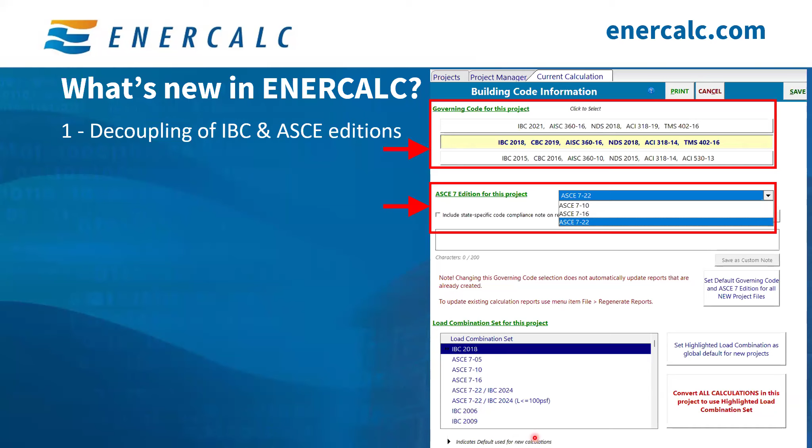Instead, they're just kind of hopping around and grabbing different editions of the code. Now you are able to do that, because beforehand all of this used to be lumped up right here. So the IBC would have an ASCE right here with it. And now you have the ability to pick these two separately. And of course, you can pick different load combinations separately as well. So you can mix and match as you please and as the jurisdiction requires.

The second update is the addition of new ASCE 7-22 modules. So we started with adding new tabs to the calculation menu. And the first tab, as you can see here, is seismic loads. We added two modules, one for seismic base shear design and one for seismic wall anchorage.

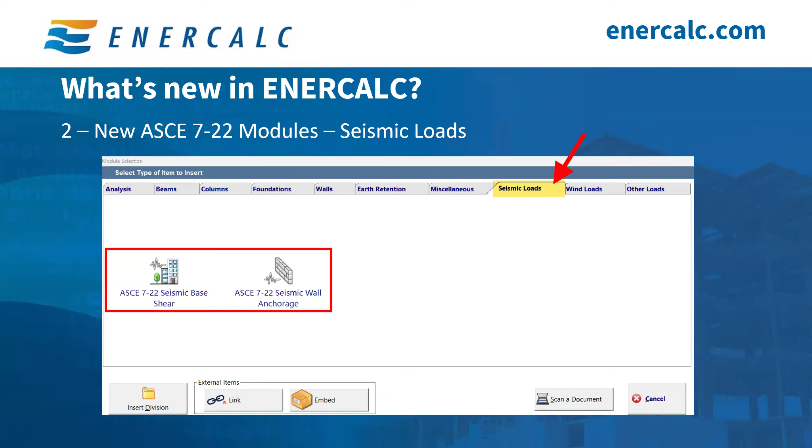Next, we have the wind loads tab. We started already by implementing a calculation for the ASCE 7-22 wind enclosure. And the other wind load calculations, such as the component and cladding or the envelope procedure for wind loads and wind pressures, are actively under development and will be released soon. And when they are released, they will show up right here.

Lastly, we have this new tab, which is named Other Loads. This currently includes a calculation for the ASCE 7-22 live load reduction, but in the future, it will also include other calculations such as snow loads.

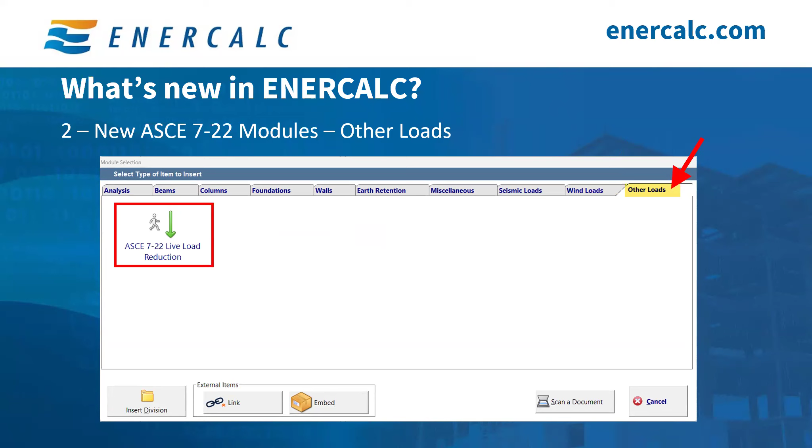One of our most requested features is the ability to automatically link reactions from one calculation to another, and the ability to change something in one member and push one button to have the effects of that change trickle down to all of the supporting members, all of the downstream members. And ENERCALC has done just that with the native load linking feature that was released a few months ago.

So you can see the new tab on the top called Calc Order. This tab organizes all of your calculations based on the load path order. You can see here that we have beam number 1 first, and then after that we have the girder, then transfer girder 1, transfer girder 2.

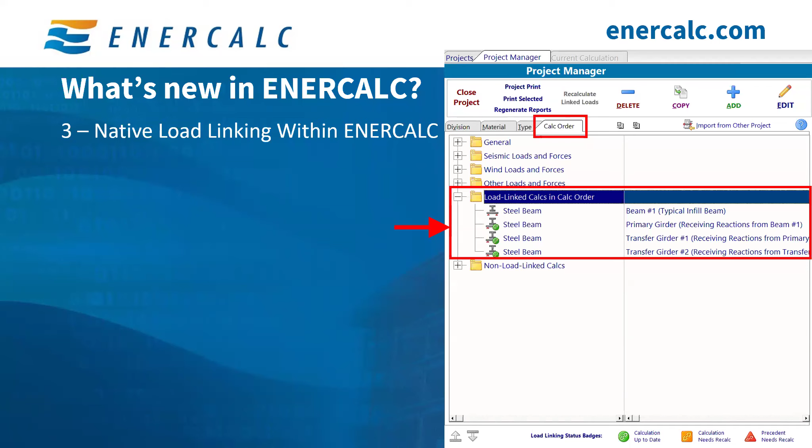You can link multiple calculations from multiple members at the same time, and ENERCALC understands the load path logic and ensures that all the calculations are performed in the load path order based on the reactions or the loads that are being linked. We also added load linking status badges to help you navigate the status of each calculation and understand the warnings a little bit better.

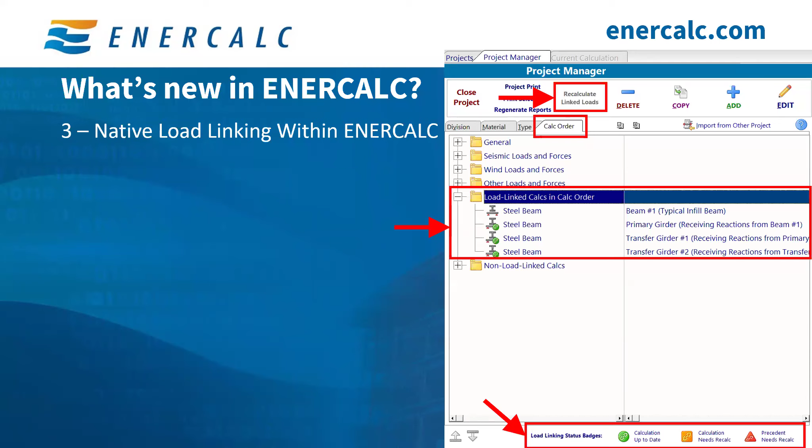The new button at the very top is named Recalculate Linked Loads. This button allows you to bulk recalculate all of your calculations to ensure that the most up-to-date reactions are being used and their effects are trickling down to all of the related downstream members.

We added a new tab inside your calculation called Linked Loads. You can grab reactions from whatever calculations you already have created in that ENERCALC project file. And then as you cycle through, this is the list of the calculations that you already made.

So as you cycle through this list of calculations, this 2D diagram changes to jog your memory a little bit about what this calculation looks like. So you can see the support, you can see the load, you can see a little bit of a 2D diagram or 2D sketch of that calculation.

Below the diagram, you will see the supports. So this is support 1, for example. This is support 2. And you can see the reactions, and you can click on whichever one you would like to grab so you can apply it onto your current beam or your current column or your current calculation.

Next, you determine how you want that particular reaction to be applied to your current member. For example, if you want it to be applied at third points, then you can just choose this. You can, of course, specify a specific location, midspan. You can do a variety of things. Once you're good to go, let's say we want it to be at third points, then you click on this button right here, the Link Load button, and the load will be linked.

And this table right here summarizes all of the reactions that you linked into this current calculation. So if you grabbed reactions from multiple beams, for example, then you will see all of them listed right here.

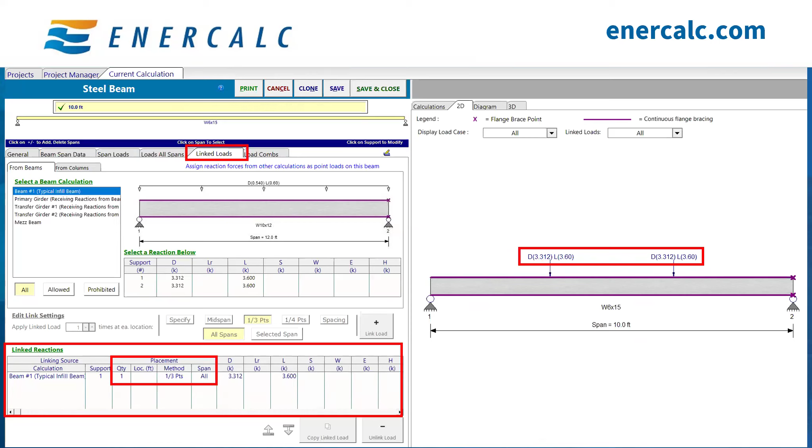As you can see, for example, this shows that the placement is at 1/3 points, and you can, of course, clearly see that already being applied in the 2D sketch at the 1/3 points. So overall, load linking is a powerful and intuitive tool that allows engineers to create a smart and well-connected chain of calculations, while minimizing the risk of transcription errors, as well as increasing workflow efficiencies.

So lastly, on this topic, if you go on ENERCALC's YouTube page and click on playlists, you will find a playlist dedicated to load linking. This one right here is the ENERCALC office hours, which has the recording of the office hours. This right here is the load linking playlist. It's a simple and easy to follow playlist with step-by-step instructions on how to use load linking. It also goes through the various workflows that you can implement, and explains the status badges in great detail to give the user a full, robust understanding of the capabilities of the load linking feature.

The first video is a full overview, and the second video is a short walkthrough of an example on how to use load linking. Videos 3, 4, and 5 are a deep dive into all of the various functionalities. You can simply give this playlist to a new engineer or someone who's never done anything with load linking, and they will be able to fully understand and follow the instructions, and learn more about the best practices of how to use this powerful tool.

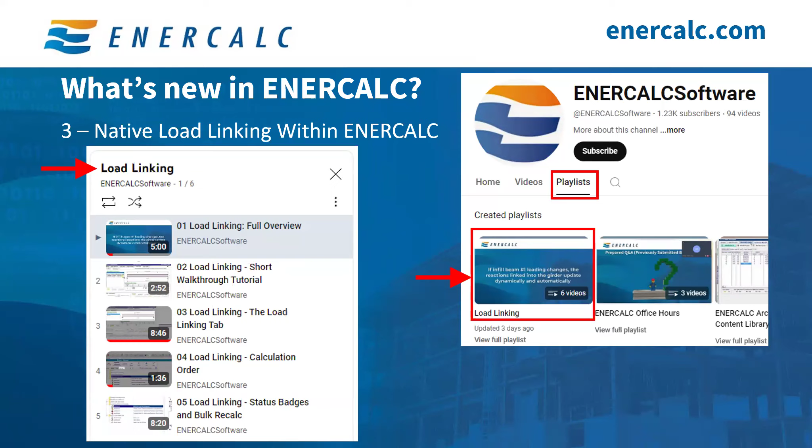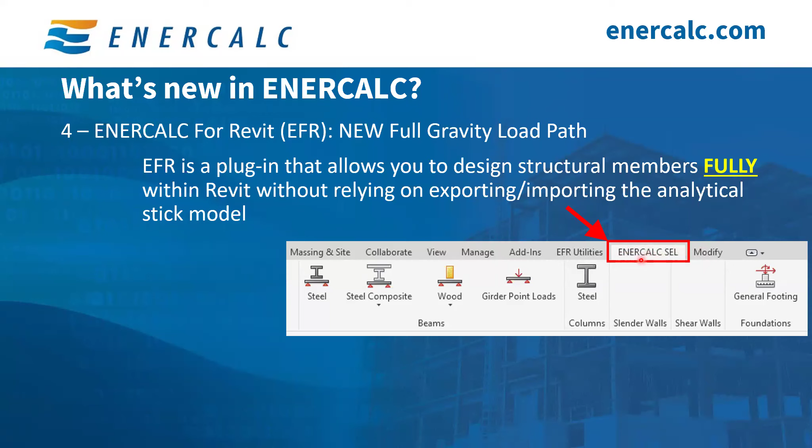Next on what's new in ENERCALC, we have ENERCALC for Revit. We have a new full gravity load path. For those who don't know, ENERCALC for Revit is a plugin that allows you to design structural members completely within Revit without relying on exporting or importing the analytical stick model. This is taken directly from the ribbon bar in Revit, and you have this new plugin that says ENERCALC. Previously, we supported steel beams, steel composite beams, wood beams, and girders. The new addition is steel column design and spread footing design, and this gives you a full gravity load path.

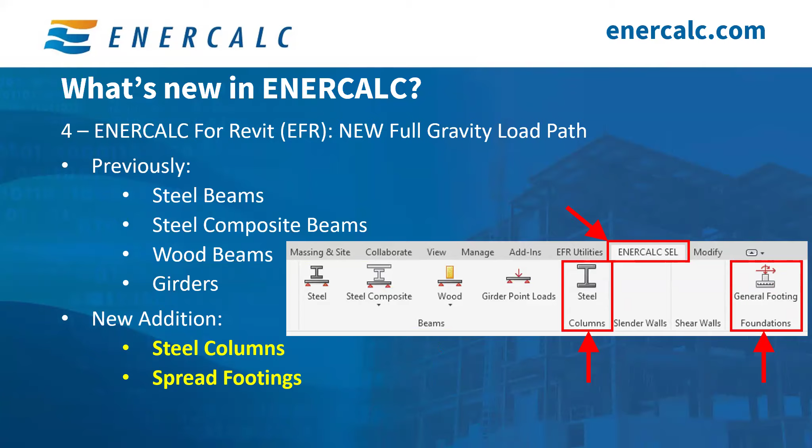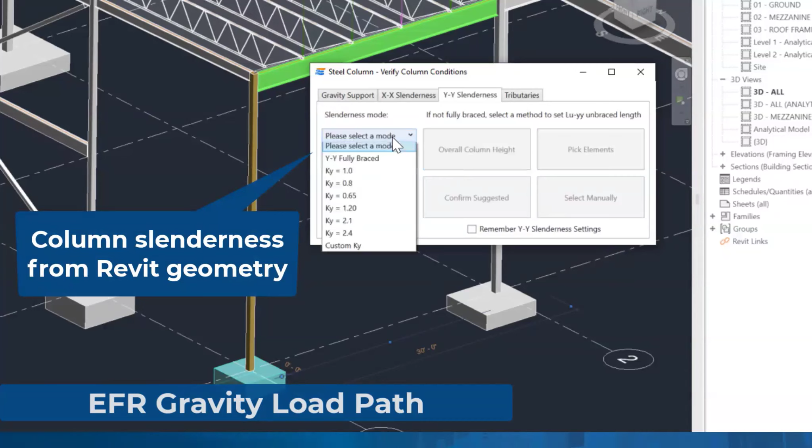To see this in action, this is your Revit model and your new ribbon bar. You click on steel column design and pick the steel column that you want to design. You confirm the gravity support conditions, work with the slenderness in the X and Y directions, and pick your K value. The next step is the tributaries, which automatically detects whatever beams are framing into the column.

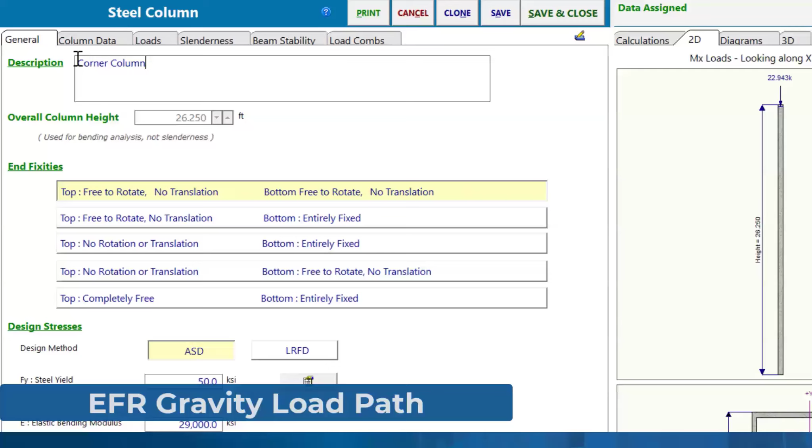Once you click OK, it automatically opens an ENERCALC calculation pre-populated with all of that information, including the column size and the reactions that came from Revit or from the girder or joist framing into it. You can do all kinds of stuff in here, and once you click Save and Close, it brings you back directly to Revit, updates the size, turns it green, and tells you this is good to go.

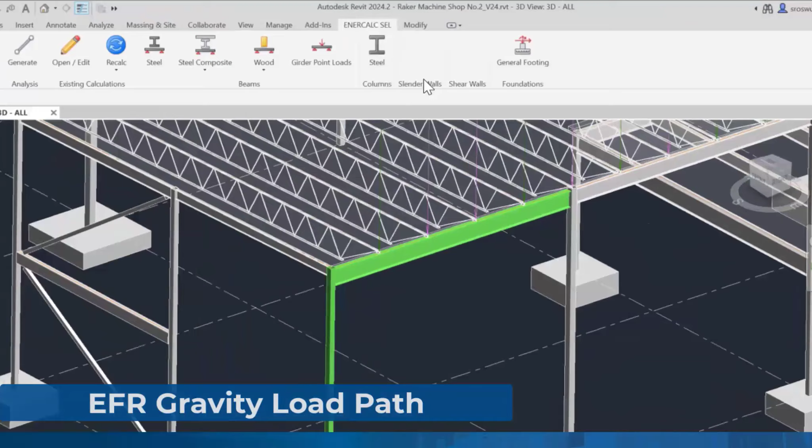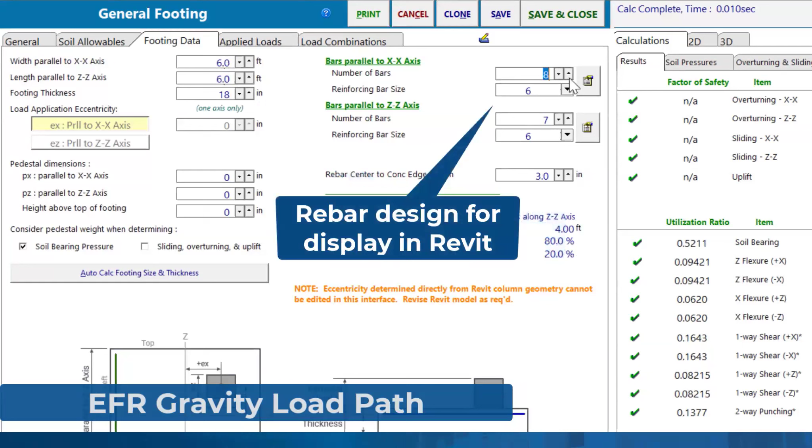You can apply the same point and click logic for the foundation as well. As you design a foundation, you click on it and it opens the ENERCALC calculation for you. It grabs the reaction again, and you can change the size or the reinforcement or make whatever design adjustments you need. Finally you click Save and Close, and it changes the size for you, updates the status of the foundation, and brings in the reinforcement information, which here is 8 number 6 each way, for example.

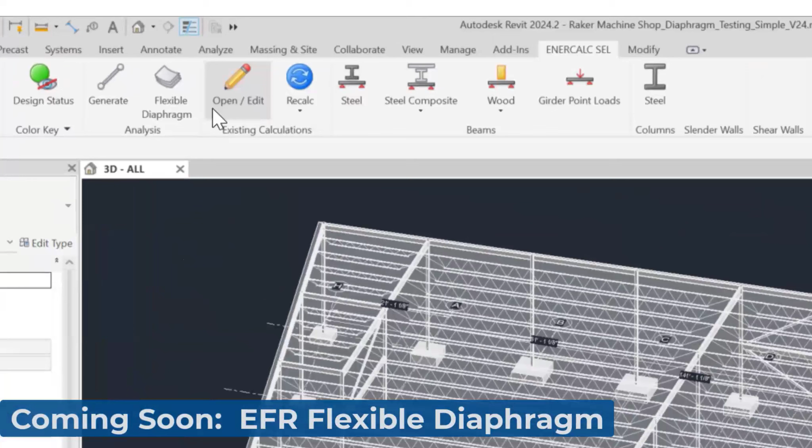Since the topic of today's presentation is wood shear walls, I figured it's a great time to introduce our next ENERCALC for Revit integration, and that is flexible diaphragm analysis within Revit. You never have to manually calculate the loads being applied at your shear walls; this will do the analysis for you. This is still not released yet; it's still under active development. But I wanted to share a little bit about how it works. It's a simple point and click. We have a brand new icon that says flexible diaphragm, with very simple, native controls.

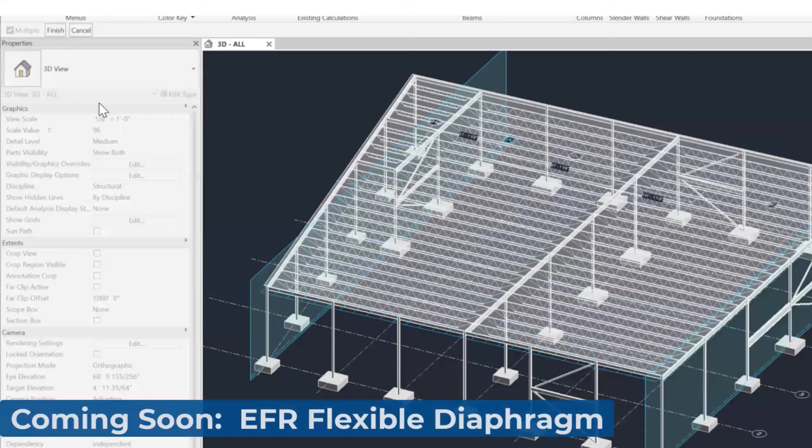It's a point and click, and it provides some interactive analysis. So you can just pick the diaphragm or the floor, and you can pick the loads that you have applied. And then you pick the lines of resistance. So in this case, let's just pick something simple, at every side of the wall or the building, and it takes the load, it runs the numbers for you, and it provides you with the reactions or the line load that's the point load that's going on top of each line of resistance.

The flexible diaphragm tool is very robust because it does, of course, cantilever diaphragm, and it can handle multiple types of loads, and it can do a lot more. This is just a simple example, but it does a lot more analysis than this. But this is the overall idea.

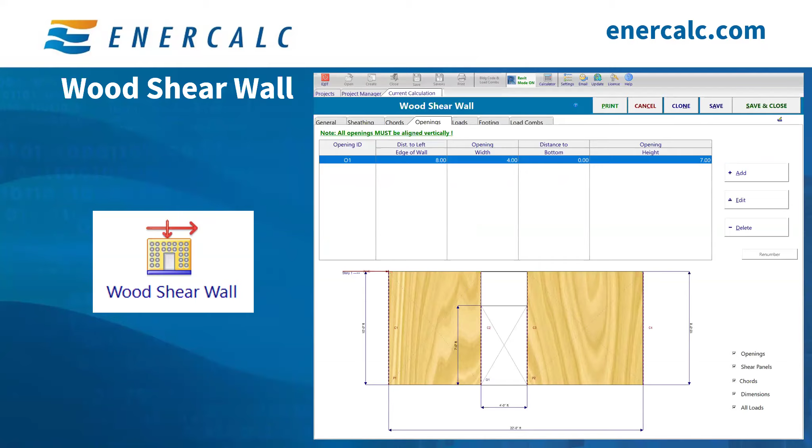Moving on, the focus of our session today is the design of wood shear walls and how you can use ENERCALC to expedite the process and make your life a little bit easier. So to start a calculation, you can follow the same familiar process, which is click on the Add button and then click on Walls, and of course, wood shear walls. And this opens up right here, which is the standard layout that we're all used to.

So on the left-hand side, you can see the line of resistance has two shear walls. So I want to start with this a little bit to identify what we're trying to do. We have a line of resistance that has this shear wall, which is panel 1, and this shear wall, which is panel 2, and they're split here by a door. So we want to design this using ENERCALC. We have to establish the geometry.

The first panel is 8 feet wide, and then the door is 4 feet, and the second panel is 10 feet wide. And then the height is 10 feet, and the height of the door, I know it's not noted here, but the height of the door is 7 feet. So the total width of the wall is 22 feet.

So on the right-hand side, which is this right here, you can see the wood shear wall module, and it's the first tab, which is the general tab. You can give your calculation a name, just like you normally do with all of your calculations. So let's call this shear wall 1, and total wall length. This is the full length of wall, and that is 22 feet. And I'm designing this wall to have stud spacing of 16-inch on center.

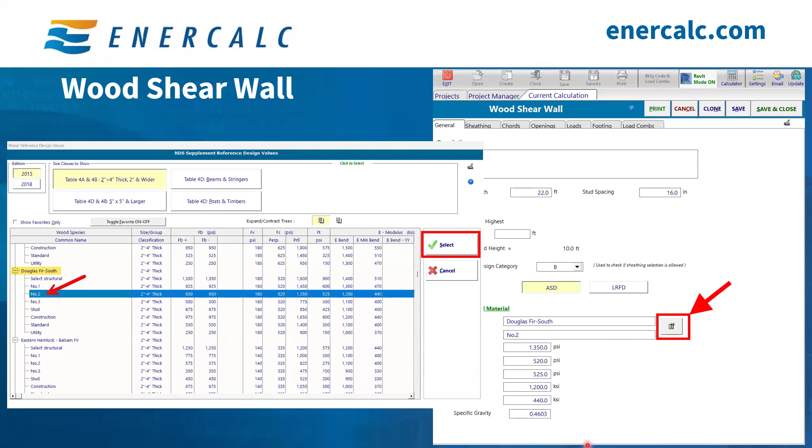And to pick that material, this is the same process that happens for wood beams and wood columns. So if you've used these modules, you should be familiar with it. And it's simply you click on this little button right here. And when you click on it, this window pops up and it has all of the reference design values for the various wood species included in the NDS. So you can pick the material that you want, then you click on select, and all of these values right here will auto populate for you.

So now we move on to the next sheet, and now things kind of start to get a little bit more focused on the module that we're doing rather than being general. So this is the sheathing tab. First, we pick the sheathing and fastening pattern on the main side. We start by picking the correct table. We'll be picking 4.3A because that is the one that we typically use for structural applications, and that is the table for wood-based panels.

4.3B is gypsum sheathing. 4.3C is for gypsum and Portland cement plaster. And of course, 4.3D is for lumber shear walls. You can do all of them, so whatever you have, that shouldn't be a problem. But for the sake of this example, we're sticking to the standard table 4.3A, which is the wood-based panels. So the next item is you select here the main sheathing from the menu.

So you will find a list of all of the sheathing materials as shown in the NDS. And for this example, we'll use the wood structural panel, 5/16 inch with 6D nails. And once you pick the sheathing material, the shear capacities right here are auto-populated based on that selection. For this example, we're using NDS 2015. So you can see the nominal capacities pulled up for wind and seismic. And those are the nominal capacities that we will use for our design for wind. So we're right here. That's the focus of today's work.

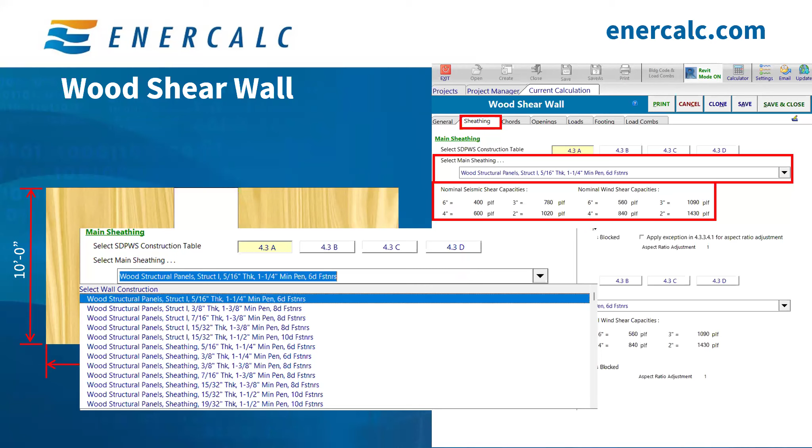So with that being said, we move on to the next part of this tab. We have the option here to select if sheathing is blocked or not blocked. For our example, it will be blocked, and this will matter, of course, in the check for the aspect ratios. If it's blocked, you have a little bit better aspect ratios that you can use with reduction, of course. But for this case, we'll just use blocked sheathing. And this right here, we're not going to use this exception for the aspect ratio adjustment, so we'll keep that unchecked.

If the wall has sheathing on one side only, then you can uncheck this option right here. If you just uncheck it, then that means the sheathing is only on the main side, and you're done. Now, if you do have sheathing on both sides, then you want to enable this option. You will have another option here that says use same as main sheathing. So that means both sides will have the same thing, and these values here will control both sides.

Now, if you want to have something completely different, you can say, okay, on the outside, maybe we'll have the 5/16 wood panels, but on the inside, I want to take some capacity from the chipboard or something. So you can get two different materials for the sheathing. Again, for our example, we'll just use sheathing only on the main side. But I just wanted you to know that you have some flexibility to use different materials and do exactly whatever you would need to do. That's why I unchecked this, and that's why all of this at the bottom here disappeared.

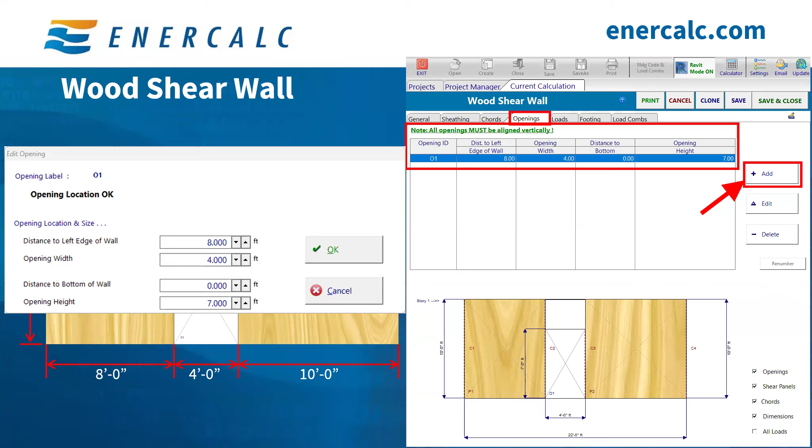Now, I want to emphasize this now that we're talking about openings. The NDS defines three types of shear walls, and this is section 4.3.5. The first type is the individual full-height shear wall. That is the standard shear wall that we all know, just a solid shear wall, and that is governed by this section right here, 4.3.5.1.

And then if the shear wall has openings, that will split into two different types. Type number one is called the force transfer shear wall, and that's the one that is designed to transfer forces around the opening, and you have to do additional detailing to transfer the additional shear around the openings. And that is governed by this section right here, 4.3.5.2.

This is something that ENERCALC currently does not do. The other type of shear walls that have openings in them is a midway method between an individual full height and the full-on force transfer shear wall. It's called perforated shear walls, and this one right here is governed by 4.3.5.3.

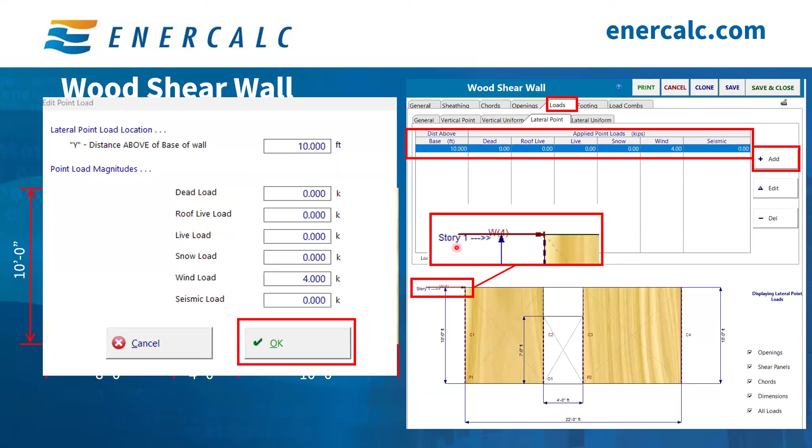You click OK, and that load will be applied, and you can see it graphically shown right here. The next tab is the footing tab, and this one is just a convenience thing. It is pretty convenient to include some of that footing information within the shear wall module, so you can do a quick check of the footing as well, instead of having to take the reactions and try to design the footing by yourself.

So in this tab, you can enter the various info that is needed for footing checks, such as footing geometry, bearing pressure, Fy, f'c, and all that stuff. And of course, how much the footing is projecting outside of the boundaries of the shear wall. So if the footing is extending all the way here, maybe 1 or 2 feet, then you enter that, projection to the left and projection to the right and all of that.

So the last tab in our calculation journey today is the load combinations tab. We have the combinations already populated and ready to be used under the ASD load combination tab right here. But you can also turn them all on or off as you need. You can delete, modify, add more combinations. You can do anything you want. You can maybe disallow some of them from running temporarily. So you have a lot of control over the combinations that you want to run.

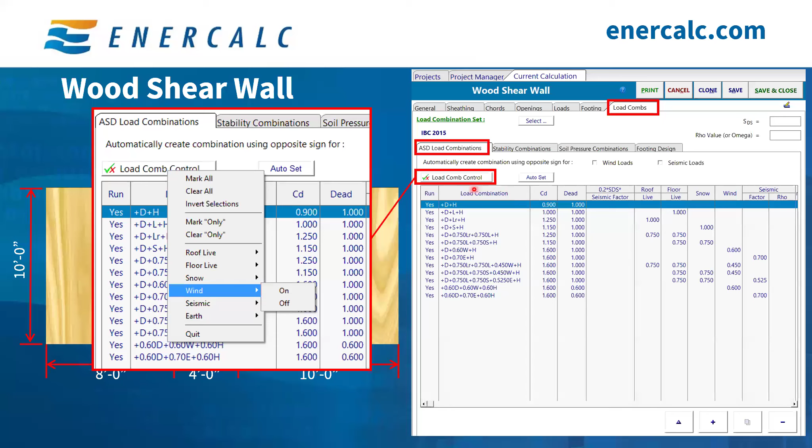And if you click on this little tab right here that says load combination controls, you will find other filters that you can use quickly. So for example, you can turn off any combination that has anything to do with wind load. You can just click on this, wind, and say on or off. If you say off, it'll turn off whatever combination has wind in it. And this is not unique to the shear wall module, but this is for all calculation modules that we have that have load combinations.

There is also a separate load combination set that is being used for footing design. This is due to reinforced concrete, of course, only supporting LRFD design. So footing design, you can see here, has its own set of combinations, which are the LRFD combinations, as you can see here, 1.2 and 1.4 dead and all that.

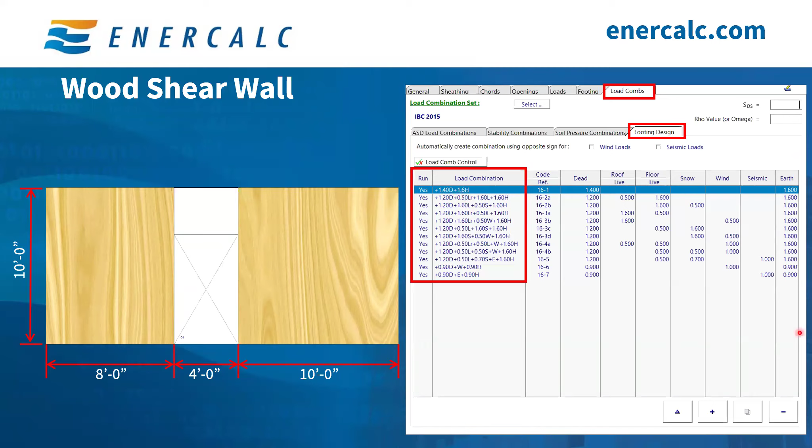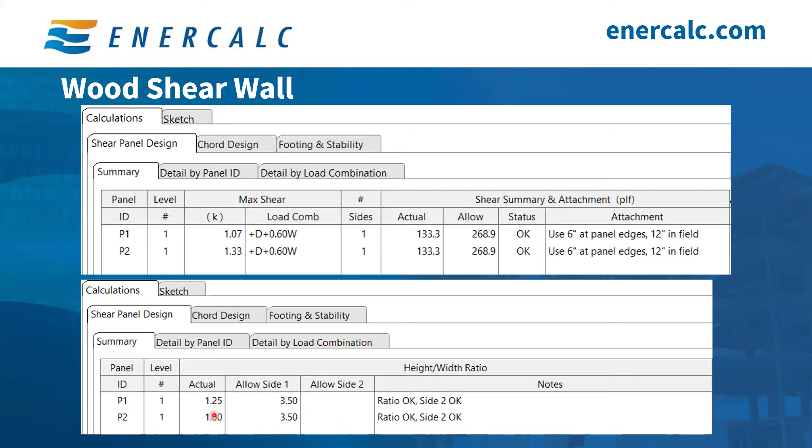You're familiar with ENERCALC, so some of these results you have to scroll horizontally to see. And that's exactly what I did. I scrolled horizontally and took a screenshot. As you scroll horizontally, you'll see more results, such as the aspect ratio of each panel, making sure that it meets code and does not exceed the maximum allowed aspect ratio as noted in the NDS for a blocked shear wall. So you can see right here, ratio is okay, and that's the allowable for each panel per side, and that's the actual aspect ratio if you ever need to check that or need it for something else.

So I want to note something about the allowable shear capacity that ENERCALC just calculated. The safety factor, the omega factor for ASD design, is 2, and this is based on NDS 2015. So this means that the capacity of the sheathing should be 560 divided by 2, which gives us 280. However, ENERCALC here shows the capacity to be 268.9, which is of course less than 280. And this is because we selected the wood material for the framing to be Douglas fir South.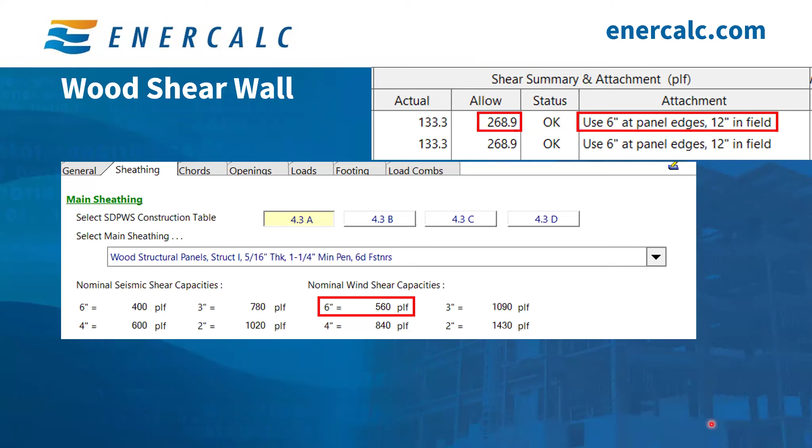And when using this material, the capacity of sheathing must be reduced based on the specific gravity of the framing members. So footnote number 3 in table 4.3a, where we have the sheathing information, says that for wood species other than Douglas fir larch and southern pine, the nominal shear value must be reduced by the factor below, which is 1 minus (0.5 minus G). And G is the specific gravity of the framing material.

I grabbed this snippet from the general tab from ENERCALC. So Douglas fir South has a 0.4603 specific gravity. So if you plug that in, you get 0.9603. So if you take 0.9603 and multiply it by the 280, which is 560 over 2, you'll get the 268.9, and that's why the capacity is reduced in this example.

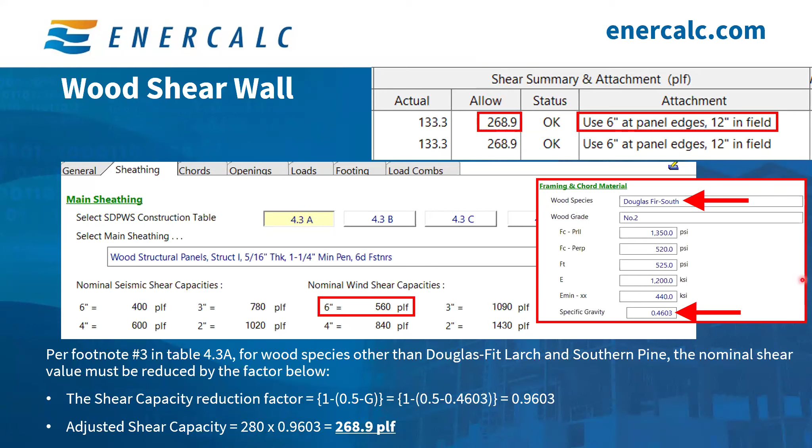Moving on, let's check the chord forces. C1 and C2 are the chords for the first panel. You can see that C1 is in tension and the load that is applied to it is 1.33 kips. The design is governed by the tension, and the stress ratio is reported right here as 0.192. Also, you can see that the hold down uplift force is 1.05.

The reason that the uplift force for the hold down is not the same as the tension on the chord is because of the weight of the panel. As you work your way to the bottom of the shear wall, the weight of the panel accumulates and you actually reduce your uplift by the tributary weight of the panel. Now, if you chose the weight of the panel to not be considered at all, then the hold down uplift will be reported exactly as the actual uplift for the chord member.

So this is just if you want to be conservative or however you want to deal with this. You have the ability to squeeze every little capacity you have, or you can just design your hold down directly for 1.33. The option is yours. And yeah, that's the same thing. So that's for the 1.05.

And then the other part that we have to cover here is the C2, which is the max compression force in the chord. It is the force from the shear wall couple, the tension compression, but also now the weight of the panel is additive to the compression. It helps you when it comes to uplift, but for compression, it actually adds to you, and that's why the compression is reported as 1.43.

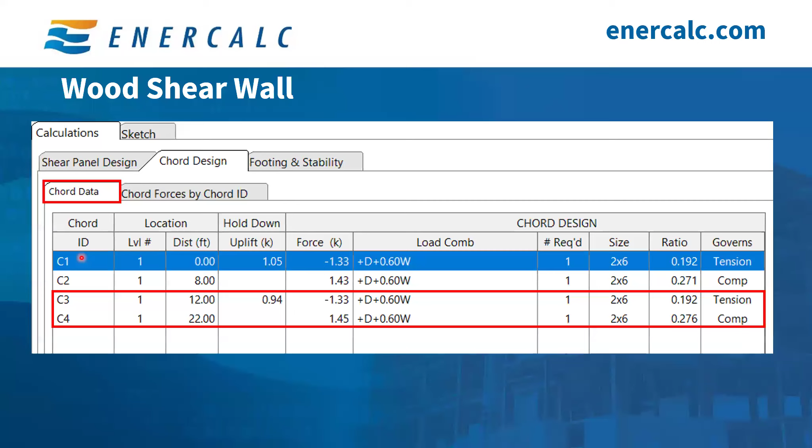Now, this additional weight helps resist uplift, so it helps you here, but it adds to your compression. So that's exactly the same logic. That's why we have a little bit more load on the compression and a little bit less load for the hold down uplift sizing.

Lastly, let's quickly check the footing and stability tab. You'll find a lot of analysis information that would be helpful to help you assess the footing. Quickly to go through this, since foundations is not the main topic today, but at least when you click on the footing stability, you can see right here, for example, overturning ratio. You can see here soil pressure on the left side and on the right side.

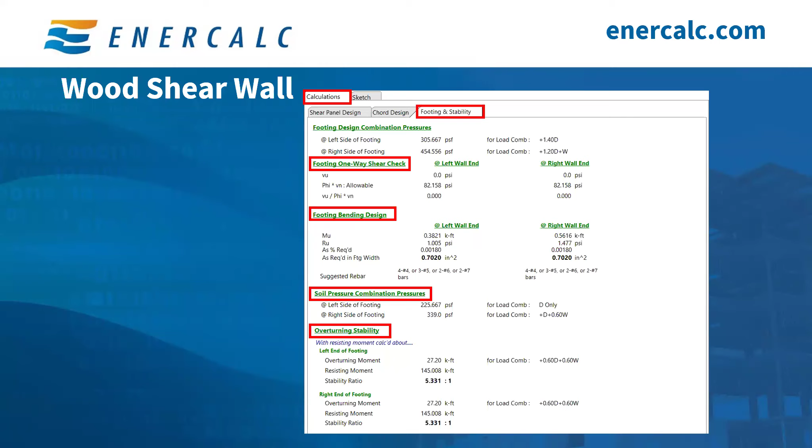So those are analysis numbers, especially this one right here. This is an analysis number, so you need to make sure to compare that to your allowable bearing capacity of the soil. ENERCALC doesn't automatically check that for you. It just reports that number, and you need to make sure that you evaluate it. The stability ratio, it already does that for you, so you're good here, and then it gives you a little bit more information about applied moment and shear and all of that to help you go through the process and at least preliminarily evaluate the foundation that you have chosen.

So in summary, ENERCALC can design a wood shear wall that is subject to axial loads, of course, as well as the standard lateral in-plane loads. ENERCALC can design one-sided or two-sided shear walls, as well as the chord members for tension and compression, and gives you some pretty good control over how much you want to use of the dead load, and the ability to check some quick analysis for footing design, as well as overall footing stability within the shear wall module without having to go outside.

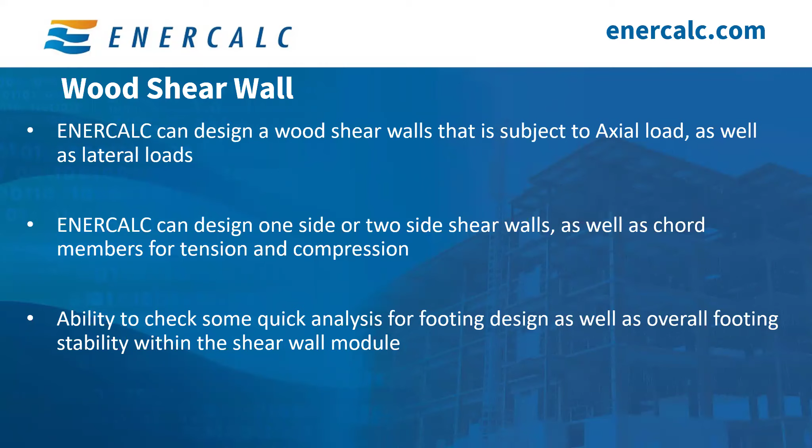So we had a question early on in the session. Are there any plans to add a feature to tie point loads together in the beam design modules? They're basically asking about moving loads. So the short answer to that question is no. ENERCALC itself doesn't have the capability to tackle moving loads right now, and I don't think we have any active development going on that right now.

But you do have some capability in ENERCALC 3D to tackle moving loads. So I'm going to drop a link in the chat to our help docs regarding moving loads with ENERCALC 3D, which you guys can reference to dive deeper on that.

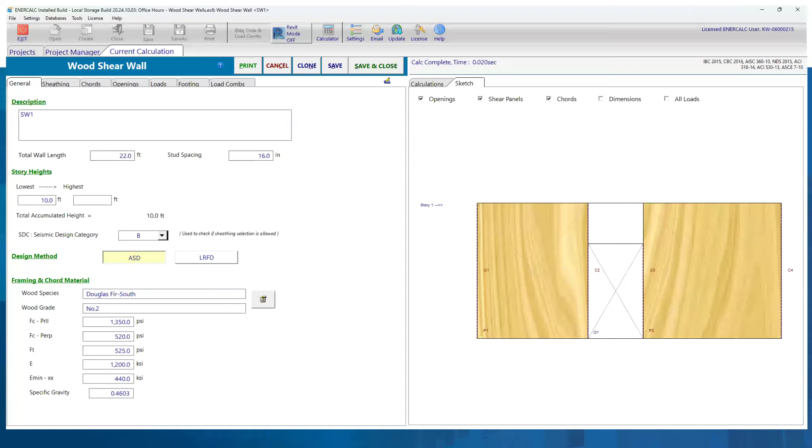All right. Question from Jose. Talking about load linking, Mac, can you also link shear wall overturning reactions from a beam? So do you want to talk a little bit about the roadmap and survey for load linking? Yes. So let me show you guys here. The way that we have this right now, load linking is only implemented in steel beams, so from one steel beam to another right now. But we want to implement it across all of our modules. The thing is that the order of development is tricky because we want to hear from our users which one is more important, so this way it gets developed first.

So with that being said, you can see right here, if you open ENERCALC and you open a steel beam calculation and you click on linked loads, can you see my screen, right? Yeah. Okay, and you click on from columns, you see right here that says load linking survey. If you click on that, that will take you to the survey that we have. So this way you can tell us where you want the reaction to go, from maybe a steel beam to a steel column, or from a masonry beam to a steel beam or something.

So you'd have to tell us, and however many times we get told one specific module, that will get developed first. But the plan is to develop for all of them, it's just the order of development. Right now, we're working on the development of linking wood beams. So that would be wood beam to wood beam, and wood beam to steel beam to wood beam, because the integration is going to be happening in all directions. So right now, it doesn't do that for shear walls. But if you take the survey, and you can take the survey as many times as you want, that will put you up in the leaderboard and allow us to develop it faster than other modules that are not being requested as much.

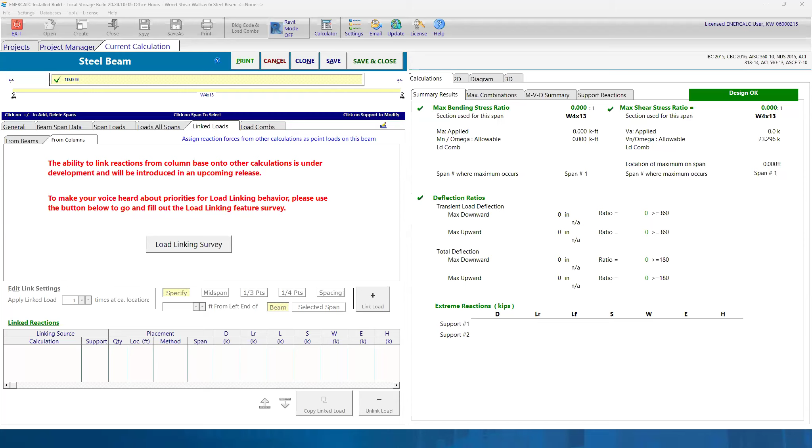We don't have an explicit timeline that we're publicizing for that kind of capability, but it's very much on our radar, and it's an issue that we want to see addressed for our customers. And if that's a big issue for you, if you haven't already, we definitely encourage you to reach out to the support team, support@enercalc.com, and let the support team know that that's a feature you're interested in, because that's what allows us to set those development priorities.

Let's see, another question. Is there any plan to have a module that will take the whole building and design shear walls, hold downs, etc., just like Woodworks software? So this is an interesting question, because ENERCALC has always had a focus primarily on being discrete component design. And that's why what Mac is showing you guys today is discrete design of shear wall components within a system. You would have your lateral system analyzed separately by hand.

So in general, we're not moving ENERCALC itself, especially the desktop structural engineering library, towards holistic system design. But with the stuff that Mac was showing you guys regarding ENERCALC for Revit, we are moving towards other more general capabilities where you have broad scope system analysis, you can distribute forces, and that will dovetail into Revit-based integration

of lateral system design. For example, wood shear wall integration, where you can take a shear wall stack geometry from your Revit model, distribute forces to it using the flexible diaphragm tool, and so on. So not explicitly as such in ENERCALC itself, but we definitely are moving in a direction where you will have those kinds of capabilities.

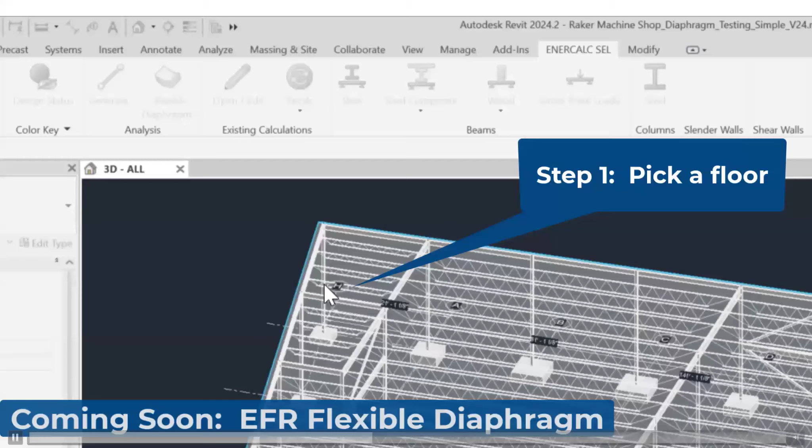Mac, this question will make you chuckle because we were just discussing this. The appearance of the shear wall on my screen is two segments shaded in gray with dashed diagonals, no wood grain displayed. Why is that? So we were discussing this issue with the engineering team, and so far the only way that the engineering team has been able to replicate that issue is if there's a specific JPEG file missing from your program files that is responsible for displaying that wood grain.

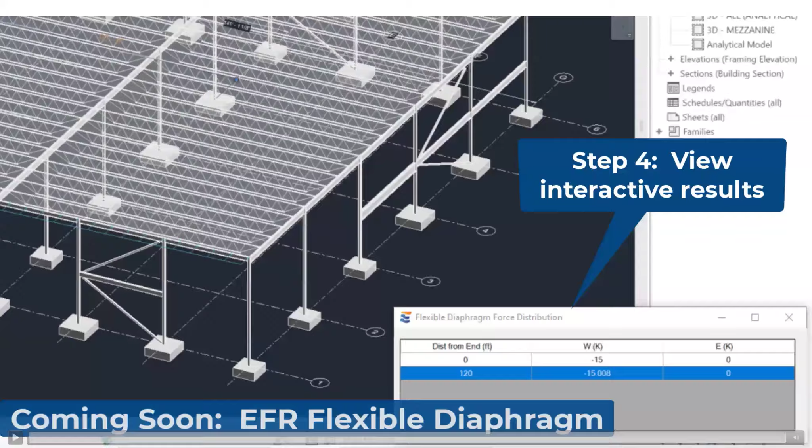If that's the case, you should be able to just go to our website and get the latest public release installer. And when you run that installer, all the files will be there, and that wood grain should appear properly. If that doesn't solve your problem, definitely reach out to the support team so that they can dive deeper and help diagnose that.

Yeah, so we already addressed questions about force transfer around openings. If you're designing a segmental wall, if you deselect the box to apply the full vertical and wall weight to the shear panel, will the dead load be distributed to 4 chords? So basically, is the dead load distributing to all chords of the wall? Mac, you can go ahead and tackle that one.

You are a little more up on that particular issue. I'm trying to see the question. I'm trying to read it. Select the box to apply the full vertical load and wall weight to a shear panel. Yeah. Is this the one? Trying to see which. Is this the option they're talking about?

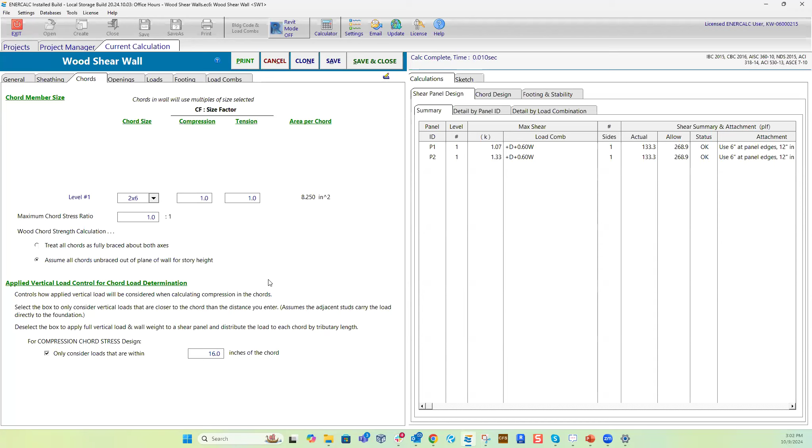Because if this is the option right now, if you deselect it, what it does, it takes the full weight of the panel. So if the panel is 20 feet by 10 feet by 10 PSF, it will take the full weight of that panel and divide it by two and dump the whole weight into the chord. It's almost like saying that, if this is my panel right here, these studs in the middle, any of the weight of the panel is being dumped only at the chord. It's almost like the whole thing is spanning.

So that will add a lot of compression to the compression post, but definitely it will help almost too much with the uplift. So I would be careful on how to use that. But yes, that's exactly what it does. If you deselect this option... the way I do it, I select this option and say only take 16 inches worth of trib and use that to add to compression or to help you with uplift, but only using 16 inches of trib that you're comfortable with.

I hope that answers the question. And each panel is being handled separately. So the weight of this panel over these two chords and the weight of the other panel over these two chords.

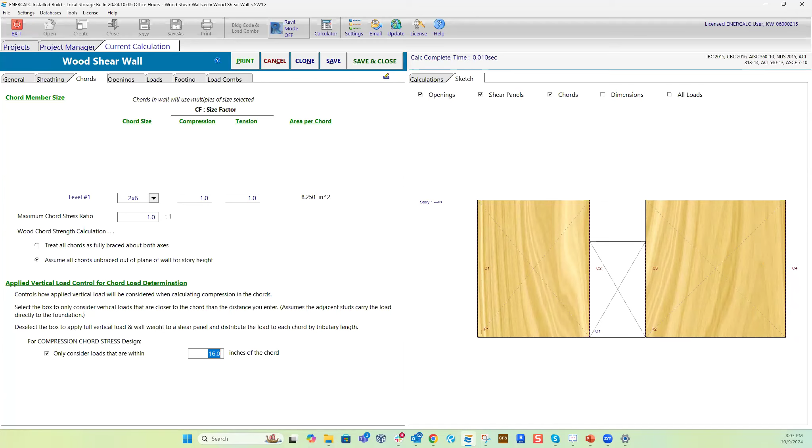Perfect. Okay, next question. NDS has an exception where if the aspect ratio of a wall is exceeded, the shear capacity of that panel is reduced. Does ENERCALC consider the proportional reduction of the shear wall capacity if you don't exceed the absolute maximum? That's correct. Yes, it'll take the reduction based on the aspect ratio, but you still have the maximum that you can't exceed, which I believe for blocked shear wall is

1 to 3.5, which is exactly what we're showing here. The one to 3.5 aspect ratio. So if you exceeded the two... So you see right here, this says the actual, this 1.25, and this is the one.

And if you exceed the two, you're still allowed to go up to 3.5, but you're truncating some of that value, or reducing some of the capacity of the shear wall. Right, because there's the ratio for full capacity and then there's the shall-not-exceed ratio. Yes, that's right. But the hard limit is the 3.5, if I remember correctly, so you can't exceed that, which I think is what they alluded to at the end.

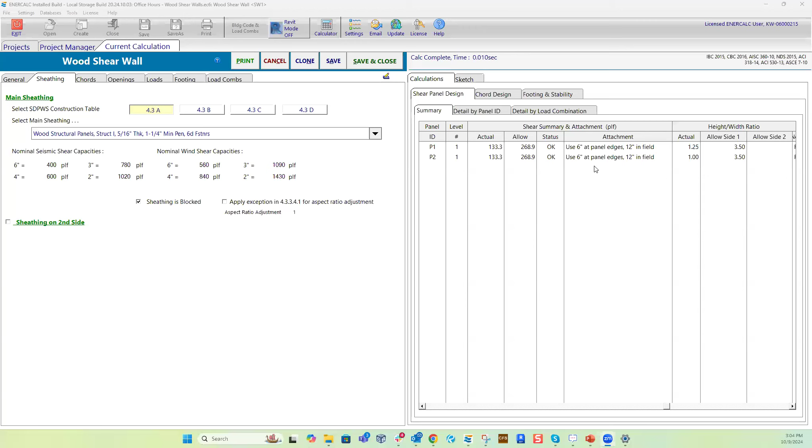All right. Is the chord member the stud at the edge of the shear wall? Yes. The chord is the boundary element at the edge of each segment that you're designing. That could be either a single stud, or I think you can do multiple studs ganged also, correct? Yes, absolutely. Right.

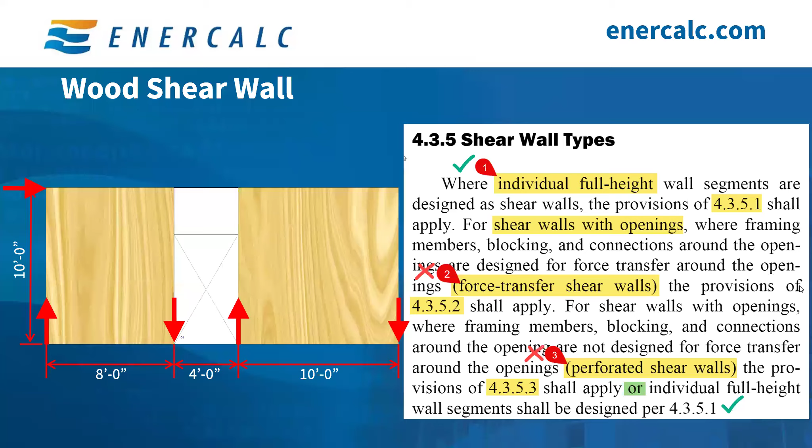Yes. So if you jump right here, first of all, you choose whichever table you want to use. This is the one that we typically use, the 4.3A, and that has the wood structural panels. You go right here and you see wood structural panels, Structural 1, 5/16, various sizes. This follows exactly the table in the NDS. So this one right here, wood structural panels, sheathing 5/16.

And particle board, plywood siding, whatever, it's already included in the NDS. You'll find it right here. And whatever you click on, it auto-populates the various nominal shear capacities for wind and seismic.

Perfect. Okay, where's the input for the tributary load of the floor diaphragm? You mentioned 10 feet, and Mac, you can elaborate on this, but I believe the analysis is usually done separately. Mac was alluding to the theoretical analysis that he had done to arrive at the forces applied to this particular line of resistance. There isn't a way within this module for you to figure out the load that's applied to the line

of resistance. So if you have a square building with shear walls on the left and shear walls on the right, you have to do your own analysis to figure out the maximum point load being applied at the top of that line of resistance. Once you put that in, ENERCALC will take that load.

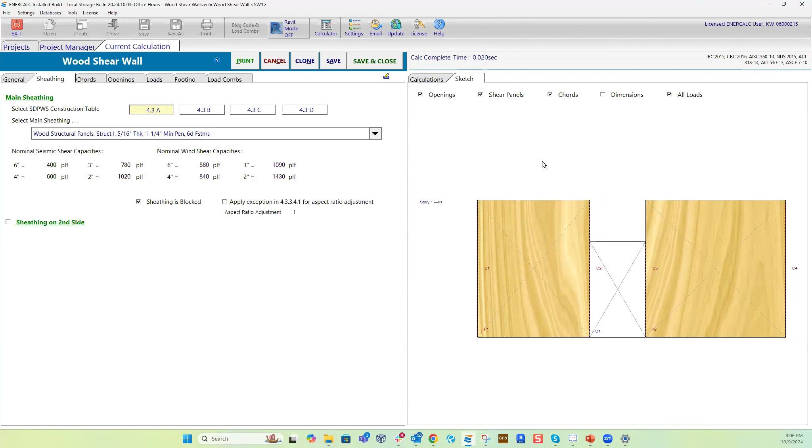So for example, right now, as you can see right here, this load is a 4 kip lateral point load. It's applied at 10 feet from the base because the panel height is 10 feet, so from 0 to 10, that's where it's applied. That load is 4 kips, but that load is then divided between these two panels.

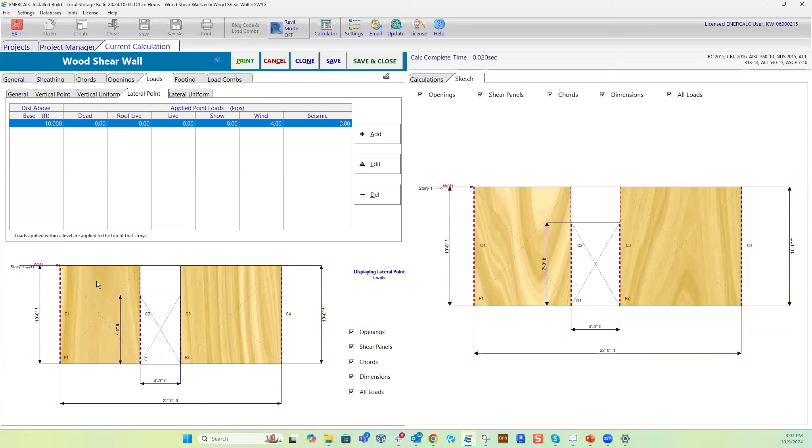The load is divided by the total length. So if this one is 10 feet, it will take more load than this one being 8 feet, because eventually they all get the same PLF. Does that make sense? Yeah, for sure. All right, next question.

Would ENERCALC consider adding a Simpson hold-down library to the wood shear wall module? This one's going to make Mac laugh as well. This is definitely something that we've talked a lot about with the engineering team, and also discussed with Simpson Strong-Tie. We know there's a lot of demand for engineers to seamlessly specify fasteners, hold-downs, and strapping products as part of the shear wall design.

So we don't have a roadmap for something like that, but it's really something that we've been pushing on, trying to find out if it's feasible. It's definitely on our radar. Mac, do you have any further thoughts on that?

Especially Simpson hold-downs and Simpson clips in general, and not just Simpson, but wood in general. There's so much variability. Simpson has a lot of products, then of course seismic and wind, and the base material, the two types of materials coming together, and all kinds of reductions.

It's definitely quite a bit of work to do it, and it's just kind of finding the right way of implementing it. So I agree with what Seth said. Yes, for sure. Next question.

How do you determine the assigned load to a specific shear wall? Is that a tributary load based on the total wind and seismic load in that direction? So basically, what Kenneth's question is alluding to is diaphragm analysis. So it depends on the nature of your diaphragm. If you meet the qualifications from the code to be idealized as flexible, then you can do a flexible diaphragm analysis where conventionally you would distribute your lateral forces by tributary width of each individual resisting element.

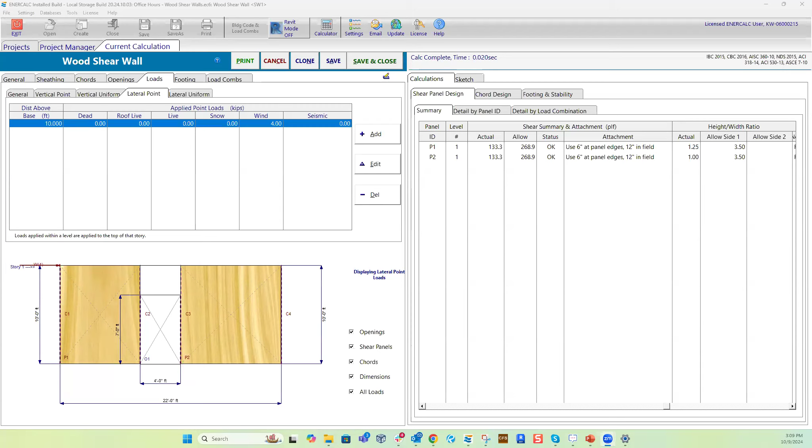If you don't meet the qualifications for idealization as flexible, then you'd be looking at a rigid or semi-rigid analysis. You could go in ENERCALC 3D and do a rigid or semi-rigid analysis. You could go in ENERCALC itself and do a rigid diaphragm analysis. Or now that we're getting towards ENERCALC for Revit flexible diaphragm, you'd also have another avenue to analyze that. But fundamentally, it's the analysis of your diaphragm that determines the specific loads that are tributary to an individual lateral resisting element. And Mac, go ahead if you had more thoughts on that.

That's absolutely right. It's going to vary so much how to determine what that load on top of your shear wall is. There's so many factors, as you suggest. Yeah, it depends on the geometry of the diaphragm itself, the flexibility or stiffness of the diaphragm, the geometry of the resisting elements, the location of the resistance lines, and so on. But fundamentally, the diaphragm analysis.

Okay. Question from Pavel. When you put tributary to the chords of a shear wall, is this applied trib for the reduction of the uplift as well? Let me go ahead and tag this one so you can see it, Mac. I see it. So when you check that we just talked about, that 16-inch or whatever, that's for compression loads. For uplift, this is a little bit tricky. Remember I was talking earlier about we have two separate values. This is your pure uplift on the chord.

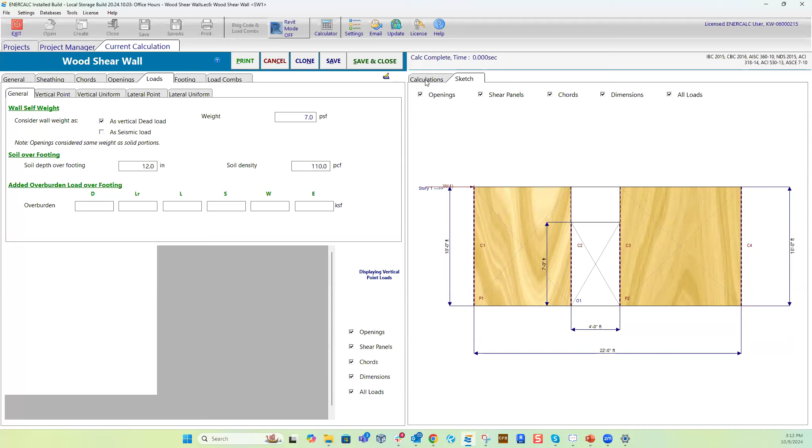It's not going to help you in the chord itself, because this panel has to accumulate the weight all the way down here. The top portion of the chord of this stud will experience the tension right there. So some people say that you can't rely on the weight of the panel, and you should only rely on it at the very bottom where the weight has truly accumulated. But to answer your question, the 16-inch strip is only for compression. The uplift on the member is the full thing; we don't reduce it at all. And the hold down is reduced by half of the width of the whole panel. So if the panel is 10 feet, then we take the weight of 5 feet.

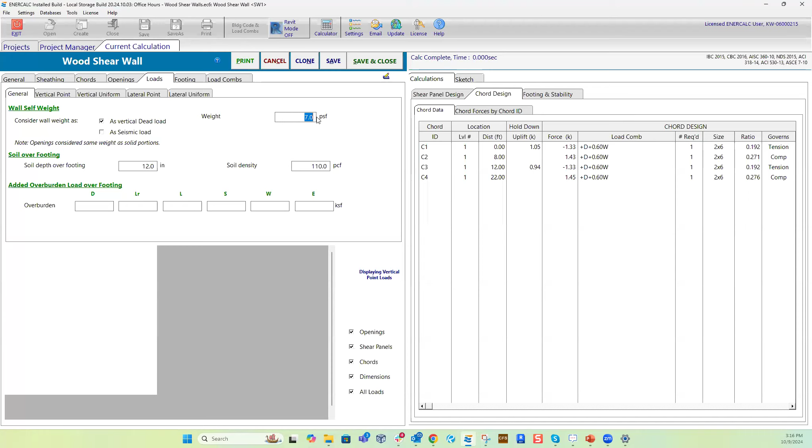Gotcha. Question from James. Using half of the panel weight seems flawed. A 100-foot long panel would not use 50 feet to help resist panel uplift. Do you want to go back to what you were talking about with the panel weight, Mac? Yeah, so if you have a shear wall that is 100 feet long, probably I wouldn't use this, but the whole point is that you have the full capacity right here that's not reduced by the weight of anything. This is the pure overturning force, which is the 1.33.

If you don't want to reduce anything, you can either just use this number, or you can simply say, hey, I don't want you to consider the self weight of the wall at all, and you can turn that off. Or you can say, I only want to consider 2 pounds. You can do whatever you want to do. The main thing is that we try to provide you with the flexibility to do different things, and whatever you think is inconsistent or doesn't make sense, you can override that and do what works best for your project.

Perfect. Okay, and then a final question. Is there any additional information one can look up regarding the design of the shear wall foundation? The wood shear wall module gives overall stability checks. It also gives maximum bearing pressure. So there's a few different ways you can go with that. You can size your width accordingly if your bearing pressure is too high.

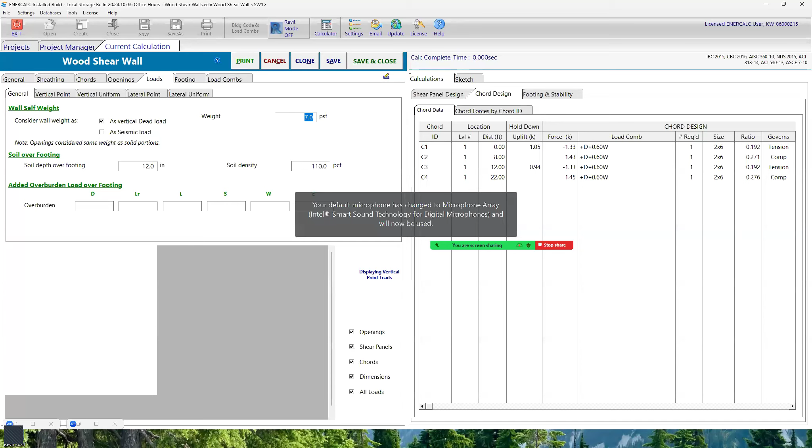Last question, back to the chords tab. Selecting, deselecting seems to apply to all vertical loads. Can you verify? Feel free to reach out to the support team if you want to dive deeper on that selecting or deselecting box, and the support team would be happy to help.